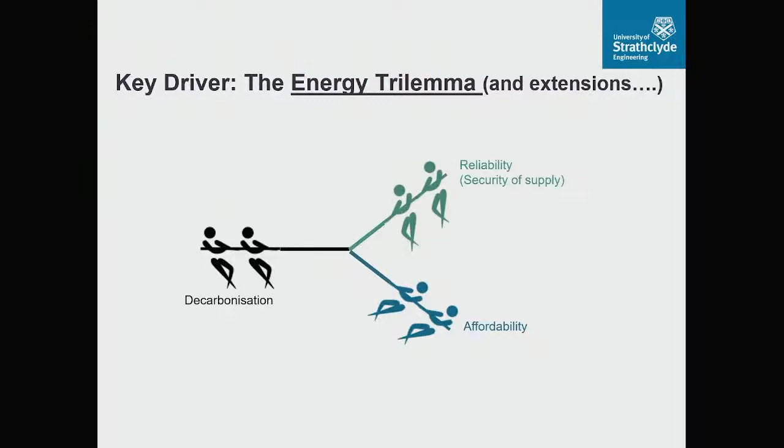But reliability is key, and of course then we have to think about affordability and cost. When I'm talking to government officials and ministers these days, I am majoring on energy security, because that is naturally front and centre of the thinking, given all else that's going on in Europe.

But if I now introduce a quadrilemma, or indeed a quintilemma challenge, if there is such a thing, we have to remember public acceptability is key - the social dimension of: can people afford to go on this journey of decarbonisation? We can hardly afford to heat our homes just now. Can they afford to get electric vehicles? Well, probably not. Can they really afford to make their homes more energy efficient? Probably not.

So they have to be given assistance to do that. And the other piece I would say, and I tip my hat here to Lord Nick Stern - those of you in the energy domain might remember 16 years ago, the eponymous Stern Review, which was commissioned by Gordon Brown, was about the economics of climate change. Nick did a spectacular piece of work which still stands to this day. He was in Glasgow with me just last week talking about building economic opportunity, building new industries, creating new markets as we create a new decarbonised system.

Remember, we had to do this. When we built all the power stations in the early part of the 20th century, we had to start from scratch. So we've got more technological sophistication now, we've got much better understanding of the need to do this. So these challenges are always there - what are our options, what's it going to cost, and are they going to work?

Again, I'm sorry for those of you at the back, I do beg your pardon - another busy slide, but amongst many other things, there's been a lot going on these days. One that I'll point to is that the Prime Minister, Mr. Johnson, published in the run-up to COP26, the 10-point plan around a green industrial revolution.

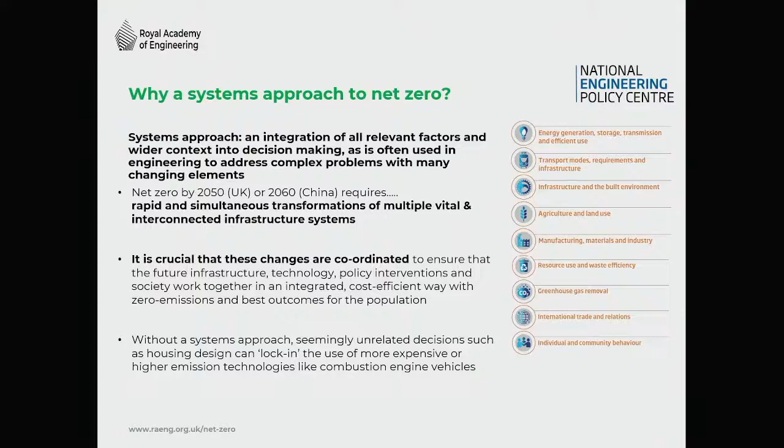Net zero in the UK by 2050, China by 2060, means that we're going to need rapid and simultaneous transformation in big complex systems - machinery of government, investment mechanisms, technological deployment, and quite frankly our behaviours and the way that we live our lives. Lots of important interactions, and it's very important that these actions are coordinated. So you need a plan, you need a system architect, and you need something that outlives the period of a government 5-year period or less, depending on what's going on in the country at any given time. So we need to think about that.

Without a systems approach, unintended consequences can happen. For example, a housing design, depending on new commercial development, unless we imagine that it's going to have hydrogen and energy storage and electrical supply for vehicles, are going to lock that away from the potential benefits of a decarbonised transport system that sits around it.

So there's a whole lot of these things I'm referring you to the Academy - please go onto the Academy's website, look for the National Engineering Policy Centre, and you'll see a stream of what I am confident are very, very good reports.

And back to Systems Thinking 101. This is generated by Professor John Clarkson, who many of you might know. He led the engineering assessment through REF. John, fellow of the Royal Academy of Engineering, did some work alongside our colleagues in the Academy of Medical Sciences and the Royal College of Physicians to get a systems approach in health.

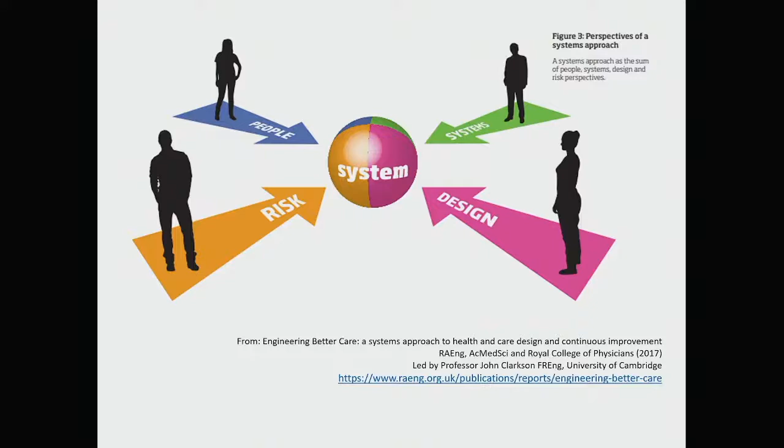So it's a dramatic way to talk about the interconnectivity of systems. The big point out of this report, called Engineering Better Care, was about taking a systems approach to health and care design. Basically there are four big components that make up the system: people, and I'll talk about skills shortly, systems themselves, subcomponents, and the design and risk perspective, because the system you produce depends on your risk appetite, and there will be risk appetite for the choices we make in coming decades around energy and its redesign. Our thanks to John, a great systems thinker, and it's that approach we've been taking into energy.

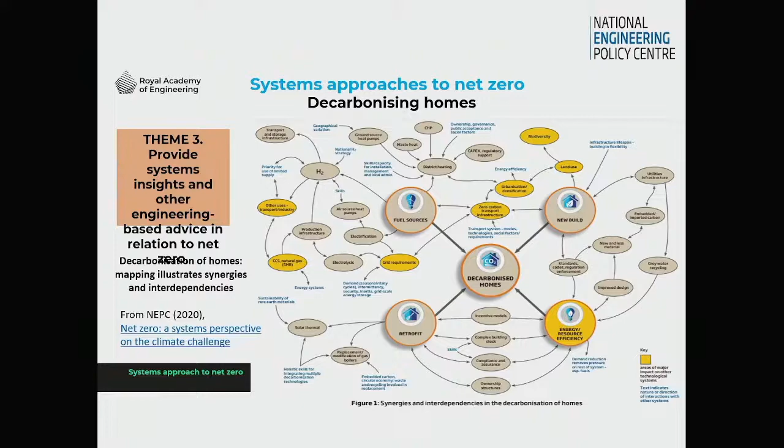You're never going to see the detail, even from the front table, so I apologize - I'm just giving you a sense of complexity. This was a first simple cut we did in the National Engineering Policy Centre around a systems approach to decarbonising homes. The central piece is decarbonising homes, then you get the first layer: how does that sit into new build and its design? What fuel sources can we think about? Is it a retrofit population of homes? What about energy efficiency? Then you build out from there and see the complexity of how this sits alongside grid interconnection - are we going to have autonomous power systems, what fuel sources do we use? I share this to say it's a standard engineering approach to get that systems map, and we need these layered system maps to understand where we need to intervene as quickly as possible. You can see hydrogen getting played in here, land use, how carbon is removed from the system.

People take electrical transmission and distribution for granted because it's pretty static. It takes decades to build this, and if you factor in planning and societal consultation - the Beauly-Denny line, you may remember, Paul, took about 12 years to get through planning. I was involved personally in some of the arguments being made, because these pylons are marching across private land and people are not happy with it, though some are. So when I talk about systems - regulatory alignment with what the government's trying to create, the smoothness and effectiveness of planning processes - it shows you the interdependency. If regulation is misaligned with what the government's trying to achieve, and Ofgem are in the thick of things just now, then we won't get things done. So bear that in mind too.

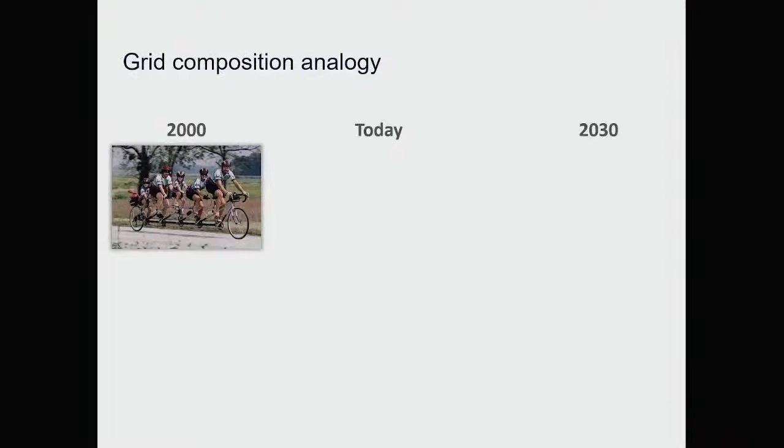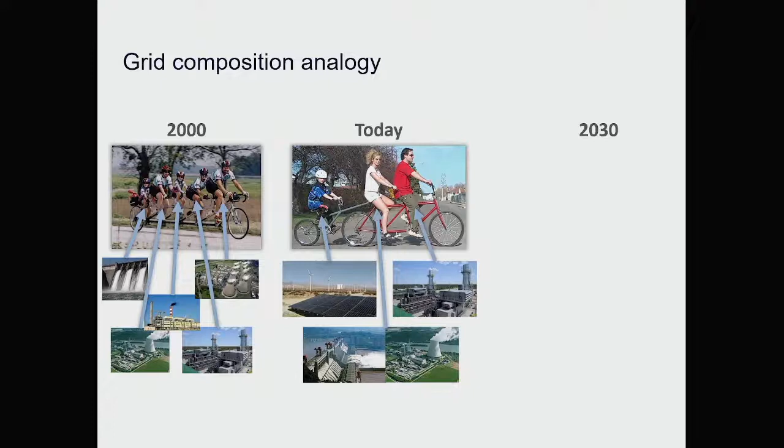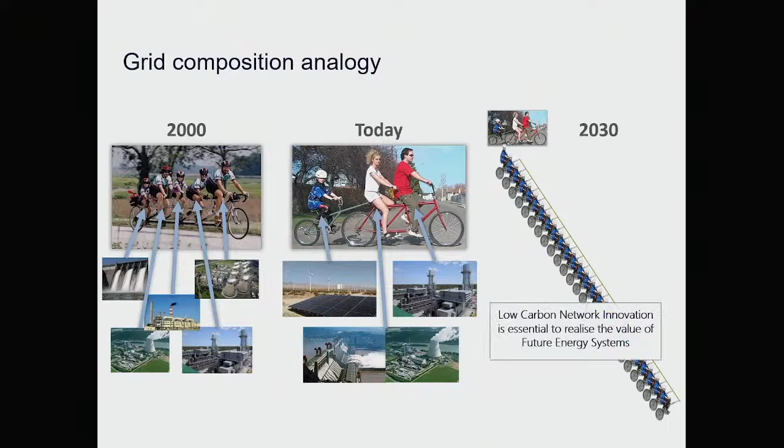Now, just for a bit of levity, let me give you an example of what the power system looks like - take this family multiple occupancy bike, with them driving the power system, using the bike as an analogy. We've got large centralized power stations - hydro, gas, nuclear, coal, but less so coal in the future. Today we've got a new mix - you can see this new appendage at the back, this youngster. That's mum and dad at the large centralized power stations, and the youngster is the new renewable deployment. But looking forward into 2030, that renewable, more distributed generation source is going to look like that - the system is not going to replace all centralized stations, but it's going to look much more like that, particularly in Wales, with wind and solar deployments. The big thing I'd say here is that to get a low-carbon network, innovation is essential.

Again, engineers innovate, well, people innovate, engineers particularly innovate, and we need to get the innovation machinery properly played here. I'll give you a quick clip of what, if I now really milk this analogy of a bike, let me show you what innovation can look like.

So here's the small-scale generator coming up the back, trying to catch up with these large centralized generations. Innovation is required.

I don't know who did the health and safety assessment on this one, but I'm going to leave it running long enough to let you see the expression. The last vehicle is a motorbike. I'm going to use that as an analogy for conventional thermal power stations. Just watch this guy. Do not try this at home, please. So innovating, taking risk, arguably taking a bit too much risk. But here he is, now getting to the front of the queue. Distributed generation, about to catch up with centralized generation, and hopefully in the back you can see the impact it can have on conventional technology.

Anyway, innovation works, but again, I'll be careful about that.

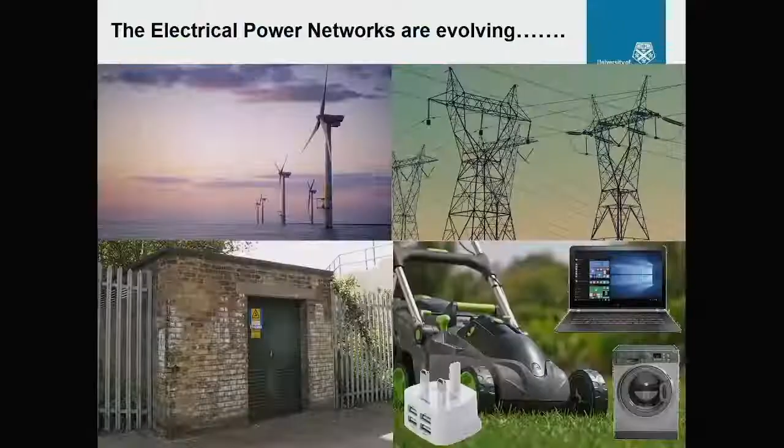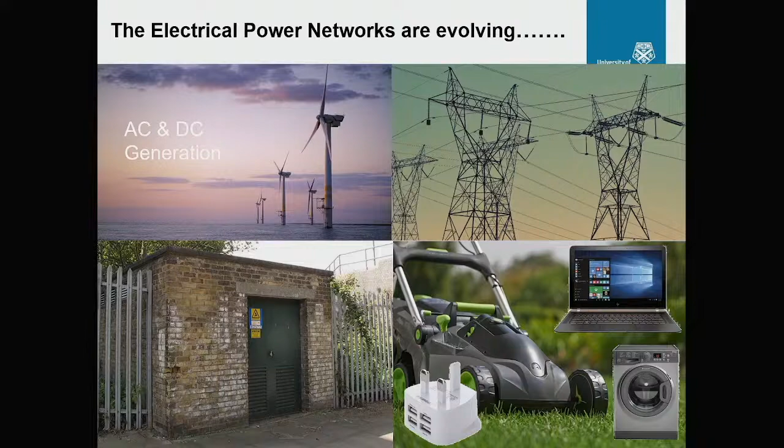And then the electrical power networks, we're evolving. I mean, we're all familiar now with the offshore wind infrastructure. We're going to get much more AC and DC generation. I'm sure there are electrical engineers in the room. The holistic network design that's just been gone through, looking at a new 10 gigawatt subsea interconnected grid, is important, but already it's probably under the capacity that we require, with more DC generation.

Same is going to be true for on-land transmission. Our own, just now, we're not quite constrained by 240 volts, 50 hertz at the socket outlet, because of power electronics and control and new devices. We can have multiple frequency devices, some of which can be higher efficiency using mixed frequencies and control of the devices.

Just think about the innovation that's been led over the past 20 or 30 years. In 1990, the typical wind turbine was about 500 kilowatts, and it was important, and we could see these spreading particularly across farmlands. Over the past 30 years, we're now looking at 15 megawatt turbines. Incredible engineering, advanced materials, structural design, new drivetrains, new machines, power electronics.

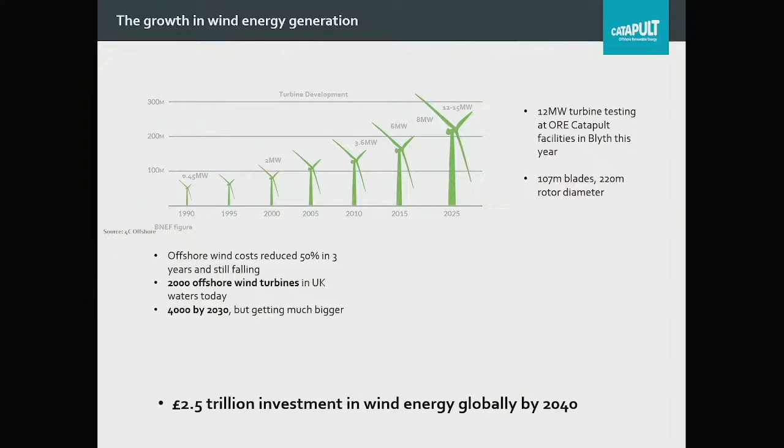For those that are deployed offshore, there's the civil engineering. It comes back to the honour that we're having tonight with the person for whom this lecture is named - the foundations, the manufacturing. And we're now talking about over 100-metre length blades, over 220-metre swept area across the blade tip. Then we've got the device in the water as well.

So back to what we're saying about creating industries, this number's going up all the time. By 2040, the wind energy globally will be up to about a £2.5 trillion investment. It's fantastic, and I have to say a lot of capability sits in the UK. What we haven't been doing is translating that into manufacturing and manufacturing jobs and O&M and service, but we're getting there.

The offshore renewable energy catapult, I was involved in establishing that, and up until last year I was the senior independent director on that. That catapult is doing a great job, and some really exotic things are going on.

Here's, will this be a 15 megawatt floating wind turbine over the next 5 years. You send an army - and this is all completely doable just now and is being done - you send an army of drones out there rather than putting service vessels out there to have to look at it. Innovation, systems thinking, offshore grid, and there's some really exotic propositions which are some time off, like multiple rotor turbines on a spar that can be floated out to sea.

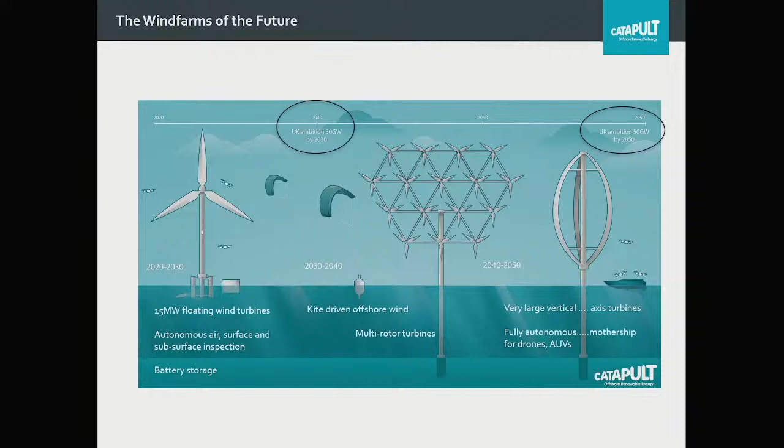There's always going to be the issue about power offtake. Do we do the energy conversion and bring it into the grid, or do we do gas conversion out there and get ammonia, get hydrogen? I'll show you a video in a moment. And again, some very interesting vertical axis turbines as well.

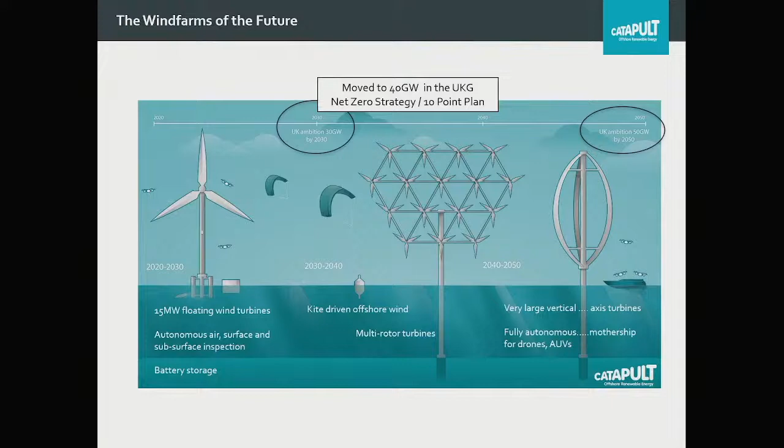This is getting ratcheted up. A couple of years ago that was to be 30 gigawatts by 2030. It's now 40 gigawatts by 2030, driven through the net zero strategy and 10-point plan. So you can see, as I come back to these interconnectivities and systems thinking - manufacturing, design, innovation, infrastructure, grid infrastructure, policy, prioritization - how does Ofgem incentivize this?

You may know that Ofgem and Innovate UK have just created a new strategic innovation fund, an innovation fund, which is really good, showing the regulator lining up with the need for more technological innovation to drive low carbon activity. Floating wind for me is - well, it's not there yet - but what an opportunity that is for the UK, because we really missed the first wave of wind in terms of anchoring, excuse the pun, the economic value here in the UK.

Floating wind, in 15 years, went from concept designs to real deployments. The CEO of Equinor would say this, of course, wouldn't he, but we have to give him credit for the success of the company, that floating wind power could outcompete bottom-fixed turbines by 2030.

A quick Scottish reference: in February this year, Crown Estate Scotland released the latest lease round, ScotWind, and 17 projects were leased, plus some additional projects came to the end, pointing towards 28 gigawatts of offshore wind by 2030. Peak demand in the UK is about 60-65 gigawatts. Scotland's peak demand is already 6 gigawatts, with about 12 gigawatts installed capacity. If we got all of that ScotWind by 2030, which we probably won't, but let's assume we do, we'd have 40 gigawatts of installed capacity against 6 gigawatts of home capacity, so we need a lot of transmission capacity to transfer that energy across the UK, prospectively into Northern Europe and across Northern Ireland.

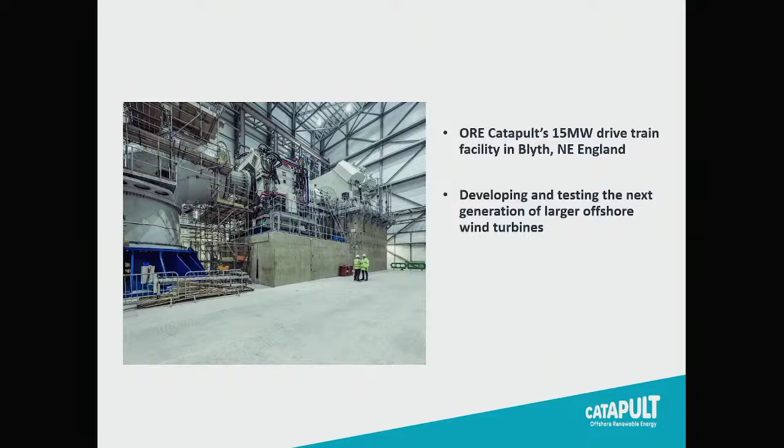There's now a 15 megawatt drivetrain facility in Blyth. Remember Blyth, that used to be the New and Renewable Energy Centre - it merged into the Catapult 7 or 8 years ago. Great engineering, great facilities, GE are bringing the machines in there. What we're trying to do is not only accelerate low carbon energy, but anchor jobs in the UK, building manufacturing plant built on UK innovation, testing and demonstration facilities.

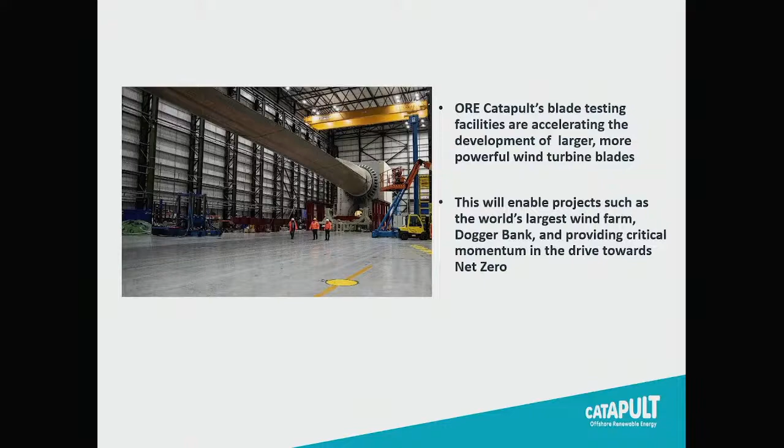And look at this for a blade - this is blade testing facilities helping support us getting up to 15 megawatts and beyond, with massive materials science challenges as many of you will know. A company called Aker - you probably know them from their oil and gas background - Aker Offshore Wind are now looking at how they recycle blades as they repower, seeing that whole circular economy around building big turbines, deploying them, and then as they're repowered or decommissioned, recycling the materials.

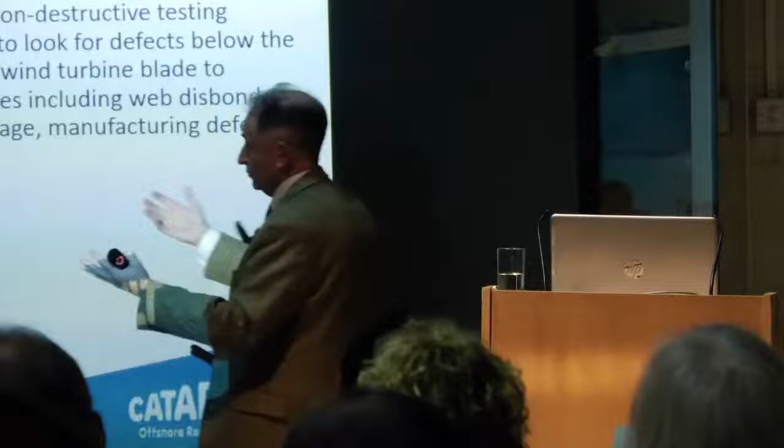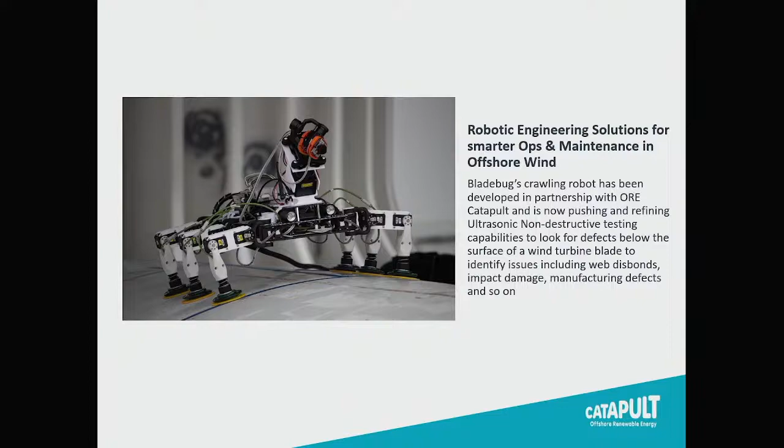So again, that whole systems approach - I talked about the three Ds: decarbonisation, decentralisation, digitisation. These great robotic automatic inspection devices, basically let them loose onto the blades, let them loose onto the structures. And of course, if you're 40 kilometres offshore, you want to minimise the personnel requirements to get out there and inspect - so measurement, control, communications.

On communications, here's a great project with a small company called Jet Connectivity, with the Catapult establishing a 5G offshore network in the Humber so that we can actually pick up a lot of these heavily sensored wind turbines, and indeed the electrical architecture that sits alongside it, allowing companies like Jet Engineering to support that new generation of automatically well-managed, digitally underpinned assets.

There's going to be probably 4,000 to 8,000 offshore wind turbines at this scale over the next 10 years - massive infrastructure, so let's use technological innovation to get there.

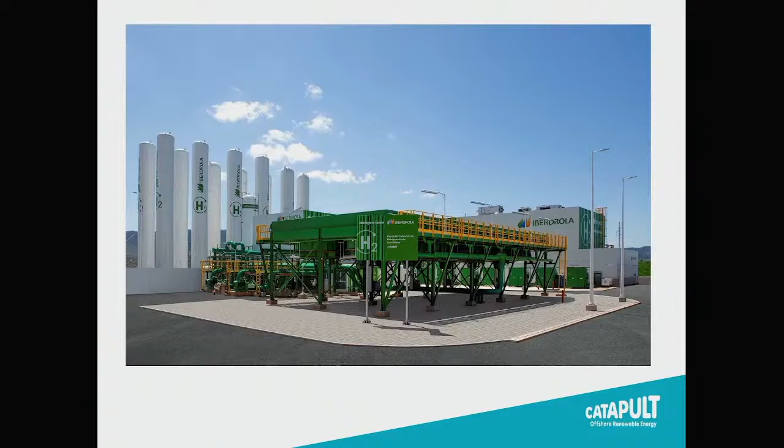But marine is still there, and the UK does have a very strong leading position. I'll point to another part of Scotland up in the Orkney Islands, and that's the European Marine Energy Centre - I commend it to you, for technical tourism it's a great visit. Orkney is a great place to be, and Neil Kermode, who's the chief executive there, would be delighted to have you visit. At any given time, they've got lots of different machines on trial. People would argue if a marine device can survive in the Orkney waters, it will survive anywhere.

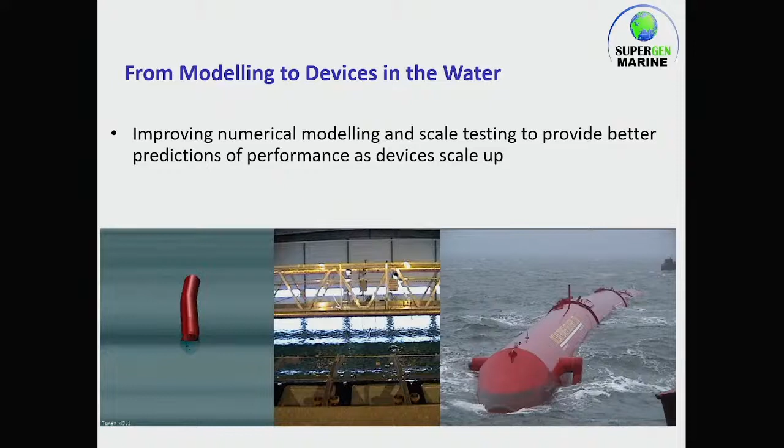And it started, I mean, again, this is not quite work. It started in the Edinburgh University test tanks and modelling. So that was a very simple Pelamis model that ultimately led to that deployment. What happened there? Yeah. And now we're scaling.

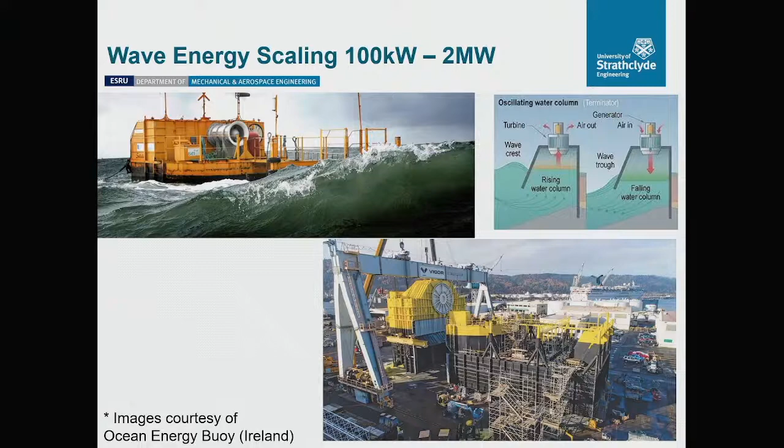So wave is still, again, it's a tough place to be. Try to scale up to the megawatt range. But there's lots of great companies in there - Ocean Energy Buoy, rising water columns, tidal energy nearing commercialization now. And here's Atlantis Resources and Lockheed Martin.

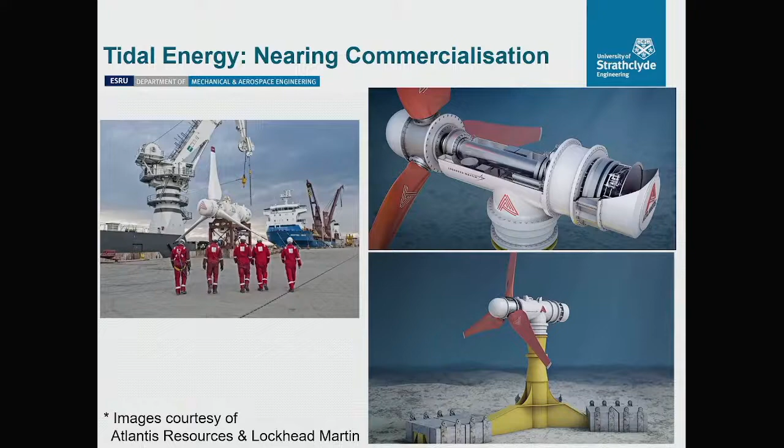So for those, again, there's lots of engineers in the room, and you start to see that design convergence. You start to see a lot of different tidal devices looking like each other. So you can see that the engineering optimization is coming up with a set of devices. So it's going to be about value-added engineering and deployment at great scale, multiple megawatts, and that's going to be important.

Back to innovation briefly. It's not just going to be the big players - it's not just going to be GE or Alstom or ABB or whoever, Vestas, that's going to give us the view for the world. There's a small organization called MARIN, which is the Maritime Research Institute in the Netherlands. Really visionary CEO. And here's his vision of a future of a low-carbon system that's tied in to maritime industry.

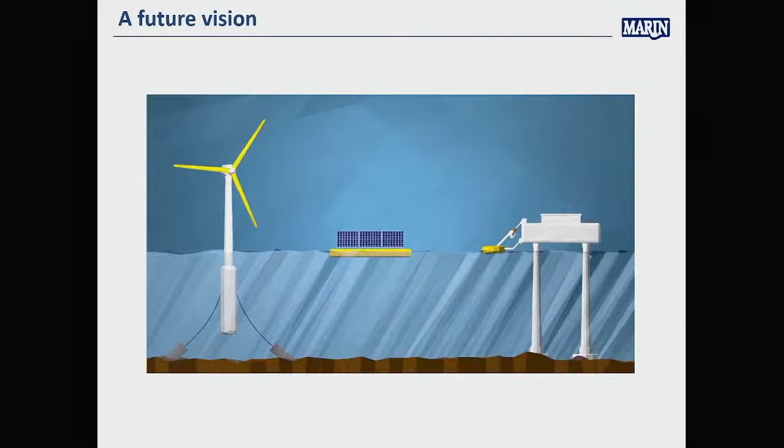This is interesting. The wind and the sun represent a massive source of renewable energy, which is more abundant at sea than on land. Harvesting this energy will require offshore wind parks and floating solar panels, as well as wave energy converters, tidal turbines, and ocean thermal energy conversion.

Processes are being developed to store the vast amount of renewable energy efficiently, in the form of hydrogen, liquid methane, or ammonia, for example. The availability of this technology offshore will be a game changer for shipping and harbors, creating entirely new maritime infrastructures.

Large-scale wind and solar-powered energy and transshipment hubs will be located along major shipping routes. Small-scale energy production along rivers or in remote areas will also appear, redistributing the energy infrastructure. These energy islands could be used for renewable energy conversion and storage, but also as logistics islands, where cargo could be transferred from larger to smaller ships.

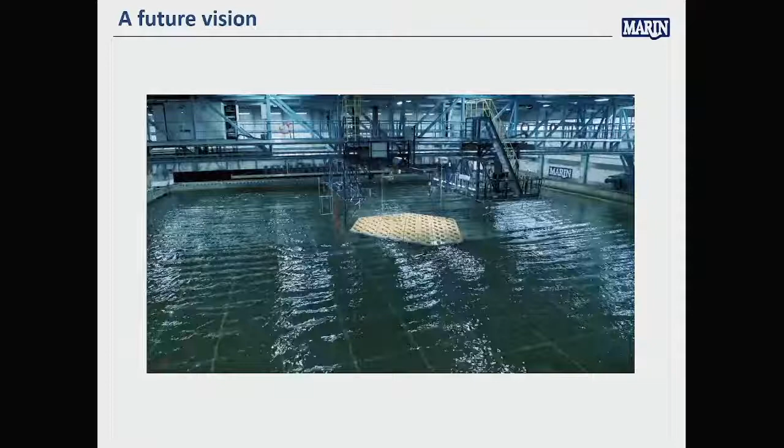Massive technological innovation will be needed if this is to become a reality, representing a true challenge for a number of industries. This energy transition means that communities all over the world will benefit from locally produced and stored renewable energy and environmental sustainability, and will remain connected to each other through zero-emission transport infrastructures.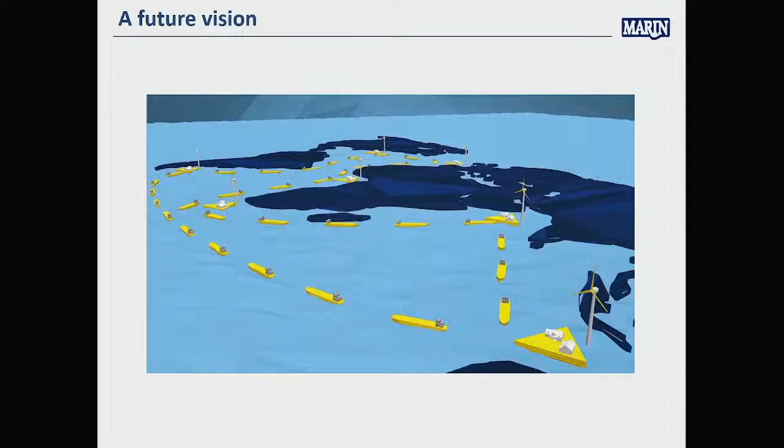The shift to ocean energy hubs will not only support next-generation shipping, but will also open up the possibility of floating settlements. Rising sea levels in densely populated coastal areas are already forcing people onto the water. These hubs could provide a more sustainable and safe environment for these communities.

So who knows, but it's a vision driven by technological innovation, by the need to address climate change, and you heard that reference to those at risk on coastal communities, many of whom are women and children, let me say, because it's often those that are most vulnerable in society that take the biggest hit for the vagaries of developed society. But very important and very interesting.

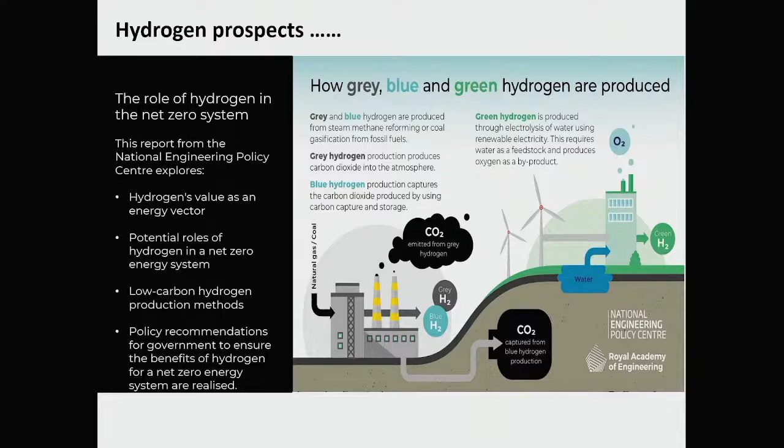Because government has a very important role to play - not just their money, but their money won't be enough. The rest of the money has to come from the private sector, so that has to be incentivised. But it's the policy incentives that get us going in this journey.

A couple of quick projects. One that I'll refer to is Project Orion up in Shetland, led by Shell and Equinor, Scottish Southern Energy. We're involved - Strathclyde's involved in the electrical system design, Babcock, Hitachi. Industrial excellence, great engineering, investment potential. Again, the vision here is about a whole system approach to energy supply in the Shetland Islands.

As you know, through Sullom Voe, known as a global hub for oil and gas, but now on that transition to do renewable energy production of hydrogen, hydrogen distribution through transport on the island, and then using that to drive industrial processes. So these companies are committing to make that happen because, again, we can come to oil and gas.

They're in a hot spotlight just now because of the major profits that have been made because of the way that oil and gas prices have gone. Windfall tax, that's for others to decide. But the energy transition, in my opinion, won't be achieved without them playing a much fuller part. They've got the balance sheet to support it, they've got the technical and engineering expertise, and they've got project delivery expertise that they can translate into this domain.

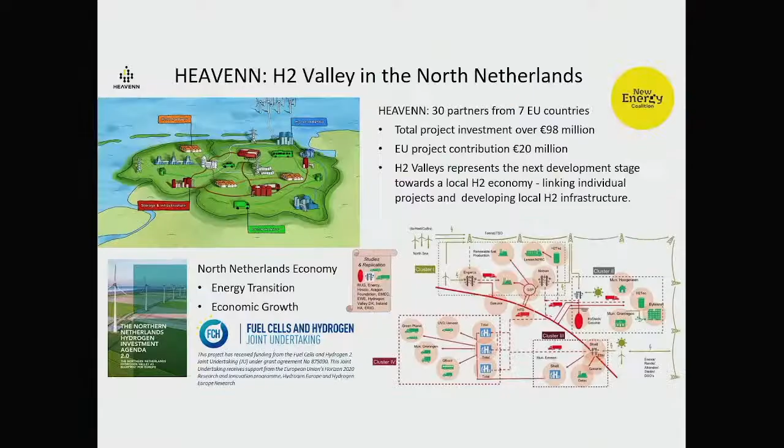So, last couple of things from me.

I've been talking mainly about the supply side, and that's important. But we can all individually make a difference to how we use energy and how we live our lives. So the demand side of the equation is very, very important. And that's about energy efficiency and energy reduction.

But now with broadband everywhere and with control devices and smart meters, we've got the opportunity to coordinate dynamic demand response to give good system management and flexible operation of the grid, and engaging end users, because we can't just do this to people—we need to bring them on that journey. Demand-side participation is very important, and lots of energy storage.

I'm sure these slides are going to be shared with the audience, so I'm not going to go through every one of them. Is that okay? Big thumbs up. So let me take you through this.

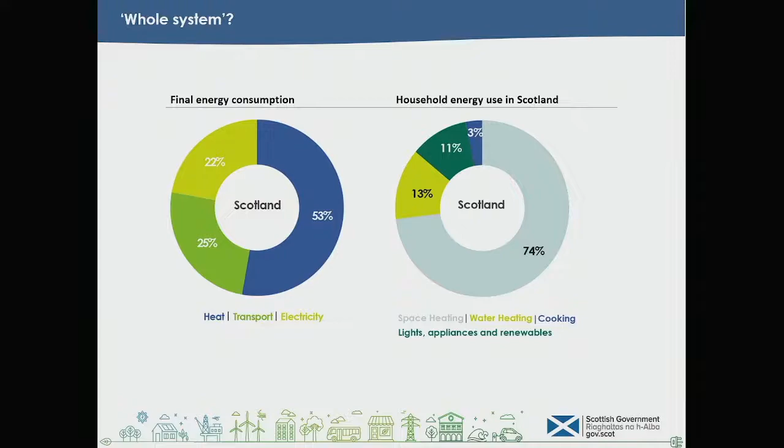This is a very simplified version of the Scotland requirement for demand: 53% heat—well, you're in Wales, I think you probably get that as well—25% transport and the rest electricity. In terms of household use of energy, space heating is a big deal, so we need to think about how we do that, including optimising the built environment, water heating, cooking and lights and appliances. In this climate it's heat, in other climates it's cooling and the likes.

So cities are very important. The places in which we live—Swansea, for example. Already over half the world's population lives in cities, and that's going to grow over the next 20 or 30 years. Big sociological and socioeconomic issues. Cities are responsible for three-quarters of the world's energy consumption and 80% of the greenhouse gas emissions.

So we can start here in the cities, which also, without getting into the politics of it, starts to give some devolved city leadership. My city of Glasgow, triggered by us hosting COP26, has a big target: they say they're going to be net zero by 2030. That's a tall order, but if you get that political leadership, that commitment, and the private sector backing, you can get it done.

So what I want to say to you—I've talked about oil and gas, and we had to make some pejorative comments. I'm not promoting them, other than to say this journey is going to be an awful lot more difficult without their active participation in energy transition. And when you hear the CEOs of these large oil and gas companies talking about the need to go through the energy transition, and their shareholders holding them to account on ESG principles, I think there's positive motivation for them to participate.

I'll just say that again—I think nuclear is bound to be part of the future. Offshore wind, solar, hydrogen production, storage, nuclear—you need that systems perspective.